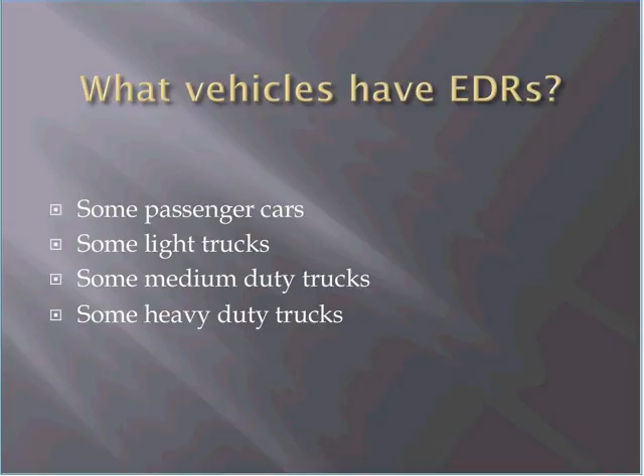Most others that I can think of seem to have them depending on the model of the vehicle, certainly model and year. Again, the newer the vehicle, the better the odds it will have an EDR in it. Some light trucks, same thing goes for light trucks. If it's got an airbag system, there's the potential it will have an EDR built into it. Medium-duty trucks are somewhere between pickup trucks and heavy-duty trucks, which are the next category. I'll get into a little bit the differences between passenger cars, light trucks, and medium trucks as a group versus heavy-duty trucks for those vehicles that have EDRs on board.

How can I find out if the subject vehicle, the one you're actually interested in finding out about, has an EDR? In heavy trucks, the EDR is typically part of the ECM. In a couple slides we'll get into what the abbreviations stand for - I'll do a little terminology so you won't be completely lost when confronted with this stuff again. But in heavy trucks, the event data recorder is typically part of the engine control module.

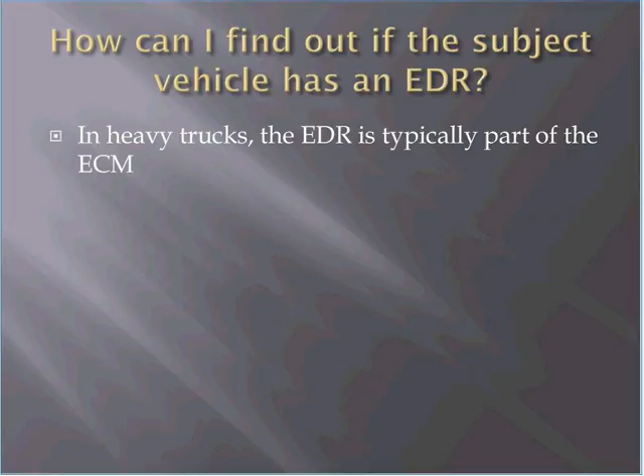I don't know if it started out that way. It turns out it is an event data recorder, but for crash applications or accident reconstruction, I think it was more of an afterthought, or somebody finally realized, hey, we can use this stuff for accident reconstruction. With heavy trucks, it's not so much a crash pulse as it is what was this truck doing. Literally, sometimes you can get data for a full minute before the crash happened as to how fast they were going, whether they were stepping on the brakes, whether the clutch was in or out. There's a lot of good stuff you can get from heavy trucks.

Heavy trucks' event data recorder capabilities are dependent upon which engine is installed in that particular truck. You can get a Freightliner truck, for instance, with either a Caterpillar, a Cummins, or a Detroit diesel engine, and depending on which engine is in that particular truck, that'll tell you how much data is available. Caterpillar has their own setup for EDR capabilities. Cummins has their own setup. International has their own setup. And so far, they're all different. Most of them are geared toward engine performance and fleet performance - it's not done with accident reconstruction in mind.

So keeping that in mind, we're lucky we get any data at all from heavy trucks. Typically, the data you'll get is in conjunction with the last time the truck came to a stop, or if somebody stops suddenly. The level of that suddenness can be programmed into the ECM to decide whether it was a sudden enough stop to bother recording anything.

But again, this is not typically crash related. It has to do more with engine performance and fleet maintenance than anything else, I think. But it does have crash investigation applications as well.

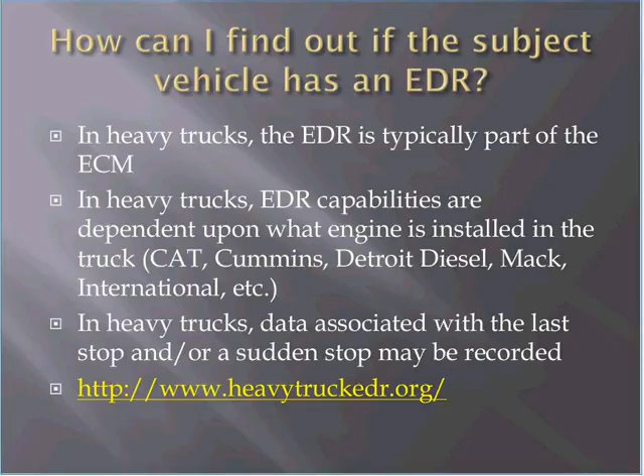All right, continuing on, for the light trucks, passenger cars, and pickup trucks, typically year, make, model, and on occasion the engine type - usually whether it's gasoline or diesel - no further distinction is necessary to find out if that particular vehicle has an EDR on board.

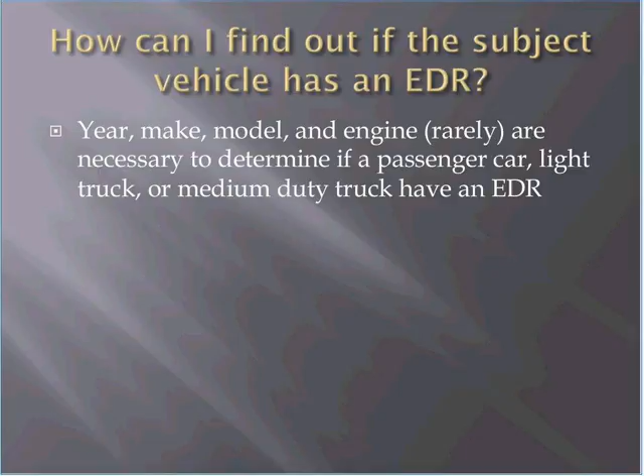Right now in North America, the software and hardware to access stored data, if it's available commercially, is going to be available through Bosch Diagnostics. I think they're the only ones still that make this type of equipment available. In some cases, only the vehicle manufacturer has the ability to access stored data.

On those vehicles that have EDRs, for manufacturers that have not signed on with Bosch to handle the technical end of the crash data retrieval stuff, only the vehicle manufacturers still have the software and data.

Even the ones that have licensed to Bosch - recently Toyota came on board - it's like a backwards integration of the systems. They start with the newer vehicles first and work backwards. Even though Toyota had EDR capabilities back to maybe 2003 or 2006 or somewhere along there in some of their vehicles, we don't have commercial access to every vehicle Toyota has made with an EDR, even though Toyota itself does, for example.

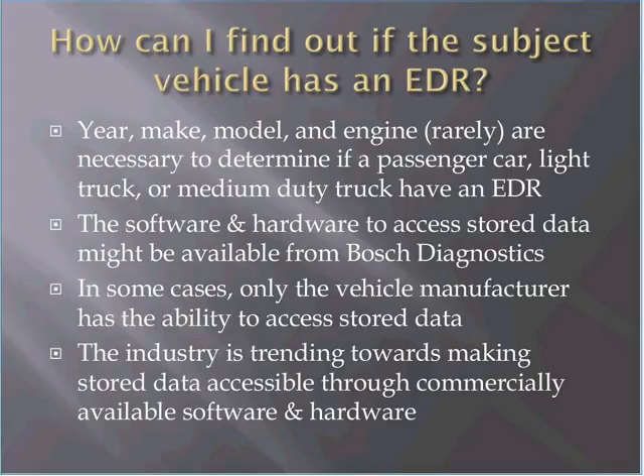The good news is the industry, I think, is trending towards making the data more accessible. Part of that is the upcoming federal regulations that I'll talk about in a bit, but they're starting to push manufacturers - if you're going to have an EDR in your vehicle, it's going to have to comply with certain things that the U.S. federal government has set up.

All right, so now to break away - because I really intended this seminar to be more about what we can do with passenger cars and light trucks and a handful of medium trucks than heavy trucks, since I could probably spend a day on each of them - from this point on, I'm going to pretty much ignore the heavy truck stuff and concentrate on the lighter vehicles.

So we're going to start with what is CDR as opposed to EDR. CDR stands for Crash Data Retrieval. This has been around since the late 90s, I think, is when Bosch - well actually it was Vetronix early on - but they started to get into this technology, and they're still currently the only ones in North America that make it available.

It's called the Bosch Diagnostics CDR system. It was formerly Vetronix, and then Bosch bought them up, is my understanding, or somehow they took control of Vetronix and started making their equipment part of the Bosch Diagnostics family.

Bosch makes the software and hardware available commercially to accident investigators, insurance adjusters, law enforcement - anybody that wants to buy it, basically. It's a program that you would load onto your computer or laptop that allows you to use a USB port connected to their hardware, and in turn connected to the vehicle in one manner or another, to access the data.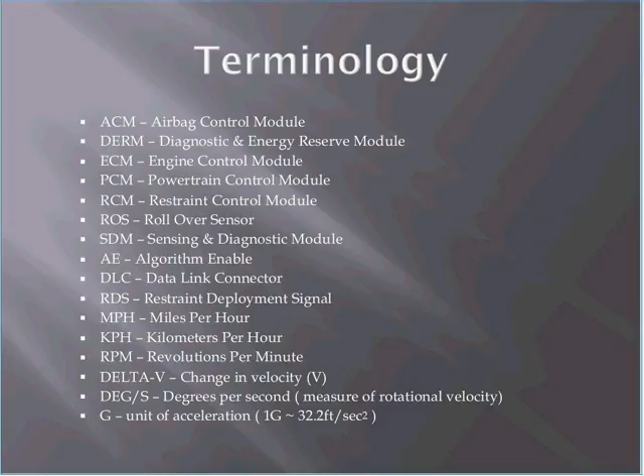Accessing data with the CDR system. Once you have the CDR system, how do you actually get this thing to tell you what you want to know? The first and what's considered the best way to do this is through the data link connector, which is underneath the dashboard typically.

You connect your laptop to the Bosch. It's actually a box filled with digital components and connectors, so it's wired in between your laptop and the vehicle. And some vehicles you have to turn the key on, some vehicles you don't even have to turn the key on. As soon as you power it up, you hit the go button on the software and it'll start to pull data from the vehicle.

The next method, if the car is so badly mangled, or if it's one where you need the keys and don't have the keys, or the wiring is torn out of the vehicle, or pretty much anything else goes wrong with the vehicle, you can access the module directly. Many times the modules are under one of the front seats, inside the bottom of the console, or buried in the dashboard near the floor somewhere. But usually in a matter of 10 to 15 minutes tops, you can get to the module and plug straight into it, bypassing all the rest of the wiring in the damaged vehicle.

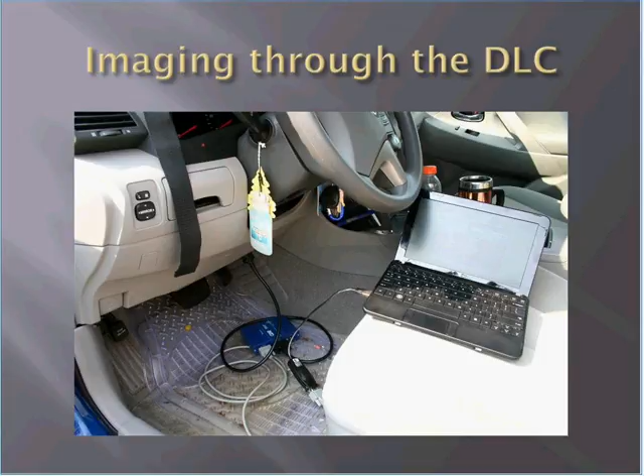Now, I tell people all the time, do we have the vehicle? I know it's been a year since the accident. It's long since been auctioned off if the insurance company didn't have a hold on it.

This was a case I did not too many months ago. The vehicle, this is about two years after the accident, was long since auctioned off, sitting in a scrapyard, being picked apart for odds and ends that survived the accident. I get there to look at it and I'm thinking, well, this is not too bad, if nobody took the airbag module out of it. I don't know why they would, since it's already been used once and shouldn't be usable in another vehicle, this particular vehicle anyway.

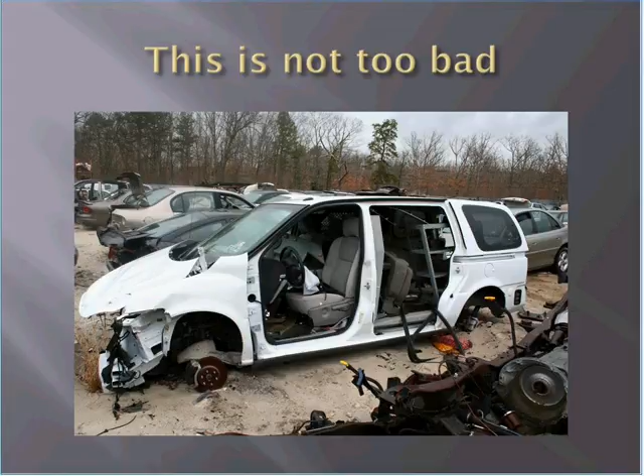So it doesn't look too bad. I said, at least we might get data from this one. Sure enough, I lucked out, and all the wiring to the data link connector was intact. I just had to power up the fuse block out under the hood, and even without the keys, this one gave me good information, even though it was a couple years after the fact.

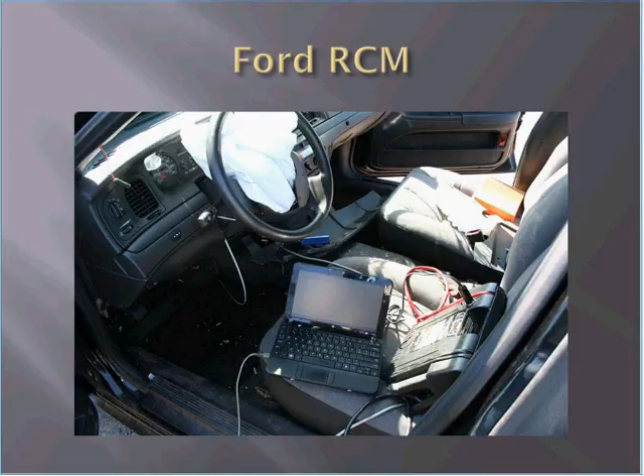Okay, now another download. This one, even though it looks like a dashboard type of deal to the DLC, it's not. This one was actually a Ford restraint control module. It's kind of obscured by the steering wheel, but you can see the airbag actually deployed in this vehicle from the steering wheel. I was actually plugged into the module itself. There's the module, located at the bottom of the dashboard.

You can see the vinyl floor mat there. The module's kind of underneath the floor mat. The gas pedal would be off to the left of that picture. So it's buried underneath the bottom of the dashboard, near where an ashtray would be in this car, I think. The connector for that is on the left side of the module. You would undo or remove that connector and sneak in the cable from your CDR unit, and you could download directly from that restraint control module in that case.

That same vehicle, in addition to the restraint control module inside, has the PCM outside under the hood, which is a powertrain control module, and that has a bunch of additional data in addition to the crash data stored in the RCM inside.

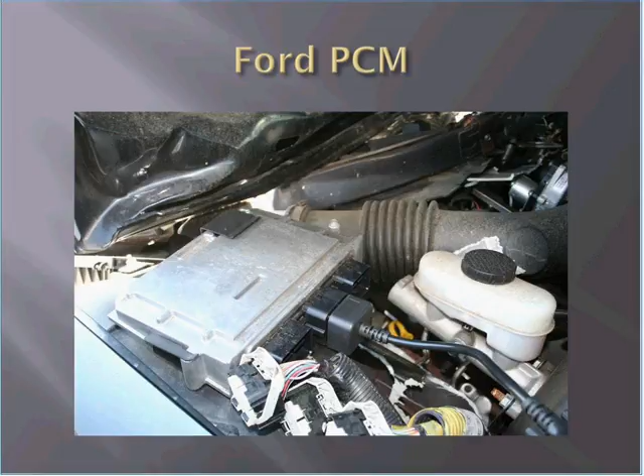Here's the connection. You see the black cable and that squarish looking plug. That's my CDR system plugged into the PCM. At the other end of that cable, it's plugged into the blue box, which is the Bosch unit. The gray cable extending away from that goes to my laptop.

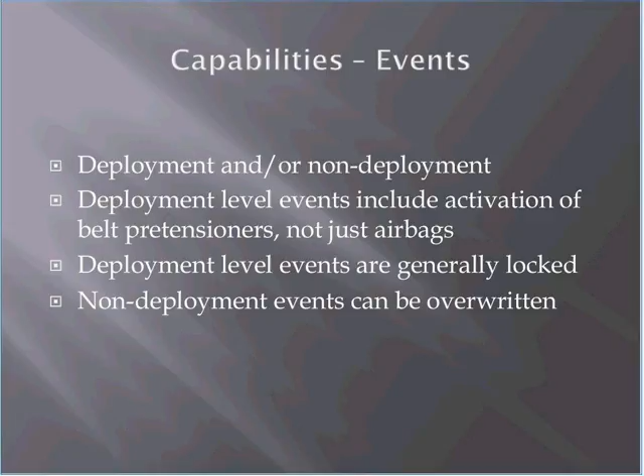All right, so now the capabilities — what kind of data might we expect to get from the different events? Certainly crash data at AE, which is algorithm enable, and after AE. So now we're talking about crash data after we've had an impact. That data is typically all gathered in a matter of milliseconds.

I'm trying to think what the longest run would be — 300 milliseconds comes to mind for maybe the longest run after algorithm enable. That's 0.3 of a second, so most of the crash is done and over with just that quickly. So crash data is certainly half a second after algorithm enable, or AE, is what you're looking at in that period.

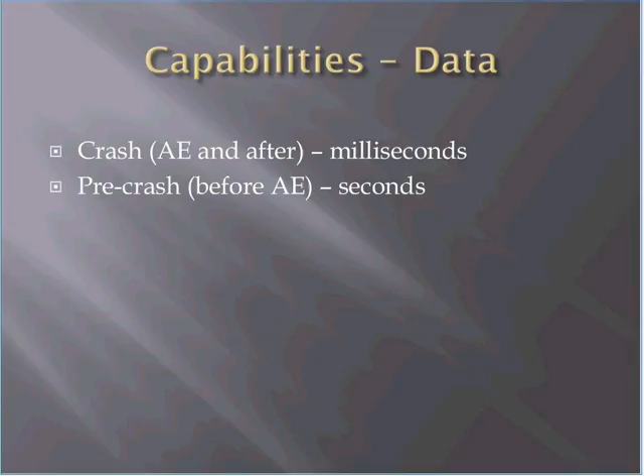Pre-crash data is what's leading up to the impact, or leading up to AE, and that could be anywhere from a few seconds to — some of the Fords will give you a couple of minutes, apparently, since the PCMs have much more memory to write things into than the airbag modules or restraint control modules. So certain Fords will give you several minutes of what the car was doing, speed-wise, brakes, what gear it was in, the whole nine yards, before we actually have the crash.

Certainly vehicle speed is one of the big things that people like to look at. Throttle position — what the driver was doing with the gas pedal, whether or not they were on the brake pedal or off the brake pedal — is another typical one. Engine speed, engine RPM, can give you an idea of what gear they were in, between that and throttle position. It tells you if they were really cranking on it to take off, or completely off, idling along with the brake on. You can judge those kinds of things.

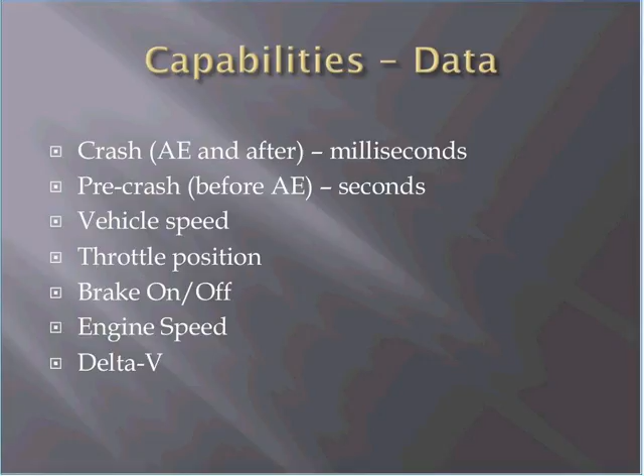Again, delta V is a common parameter that's displayed or gathered in a CDR imaging. And seatbelt status — with a few exceptions, I think you almost always get driver's belt status, which is about everything I've ever seen.

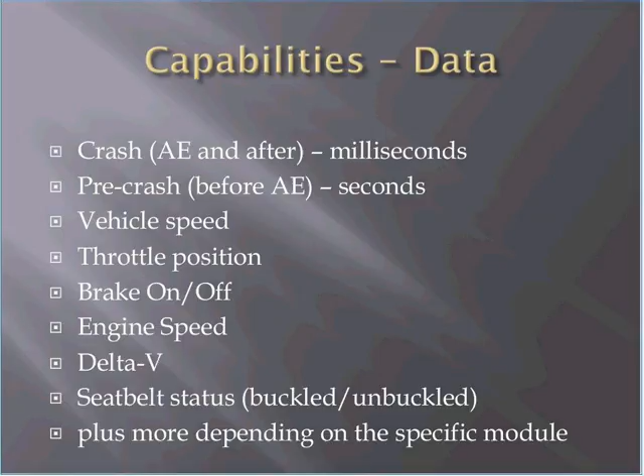As time goes on, the data that's available gets better and better with newer vehicles. They give you so much data, it's almost amazing anymore. It's hard not to view this as a standalone thing, which you shouldn't do, and I'll talk about that in a minute. But you do get a lot of data, everything from steering wheel input to whether or not the cruise control was active. A lot of good information.

Okay, now report formats. Once you've got the data and you've downloaded it or imaged the module, you've got the data on your laptop or desktop. What do you do with it?

The Bosch CDR system will save it in a .cdr file, which, unless you have the Bosch program, is pretty much useless unless you want to email it to someone else who has the Bosch program. You need the Bosch software to actually open a .cdr file. But the good news is we're told that CDR files cannot be manipulated or doctored in any way, shape, or form, unlike PDF files, text files, or comma-separated value files. The CDR file is almost guaranteed to be the real deal.

Next, the CDR program can also print out a PDF file. It's essentially the same viewing you would see in a CDR version of the report, except it's done in Adobe PDF for people that don't have the CDR program to open it.

And last but not least, the CSV files—the Bosch program can export all of its data into a CSV file that you can dump into an Excel spreadsheet or whichever program you like to analyze the data. I'll show you one example of that toward the end of the presentation, a slide showing what you can do with that data.

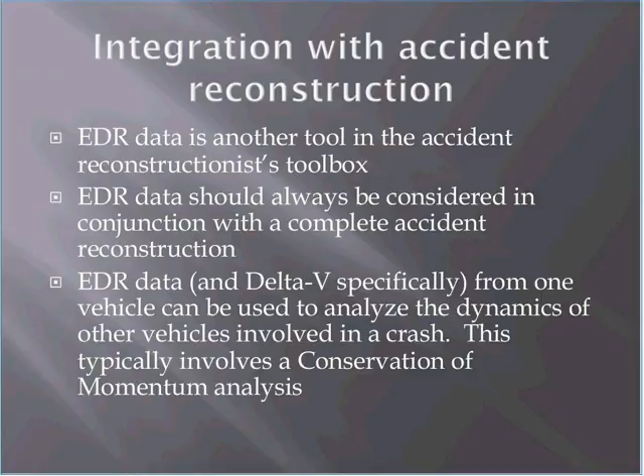So you'll more than likely be able to get the weights of both vehicles with the speed of one vehicle, or the delta V from one vehicle and the weights of both vehicles. You can do a lot of accident reconstruction just from those very, very basic things.

All right, now federal regulations. Back in 2006 or thereabouts, the federal government said, okay, it looks like this EDR stuff is going to be something we should watch over and maybe regulate, for lack of a better term. So they came up with 49 CFR, Code of Federal Regulations, Part 563, and that covers these areas.

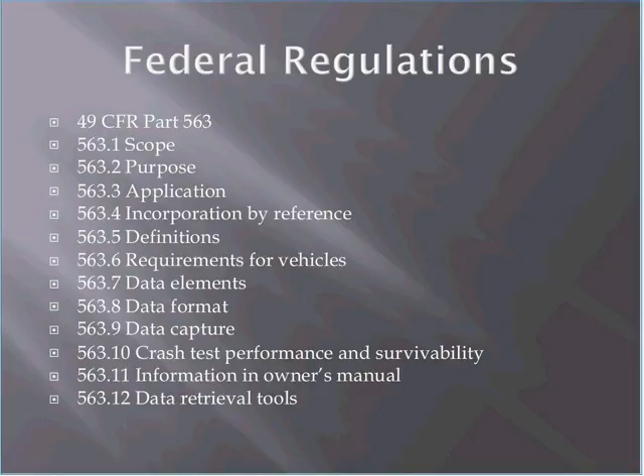And basically, I'm thrilled to see this because for many years I was an automotive technician, and nothing aggravated me more than having every manufacturer out there have different software, different hardware, different acronyms for everything under the sun, different parameters. There was no commonality between one manufacturer's line and another's with diagnostic equipment. And I feared that the EDR technology was going to go down that same road, but the federal government stepped in and said, basically, let's see, the next couple of slides I think it'll show you.

Here's what they said. This part specifies uniform, which is good, national requirements for vehicles equipped with event data recorders. Now you can read the rest and see that it concerns pretty much everything involved.

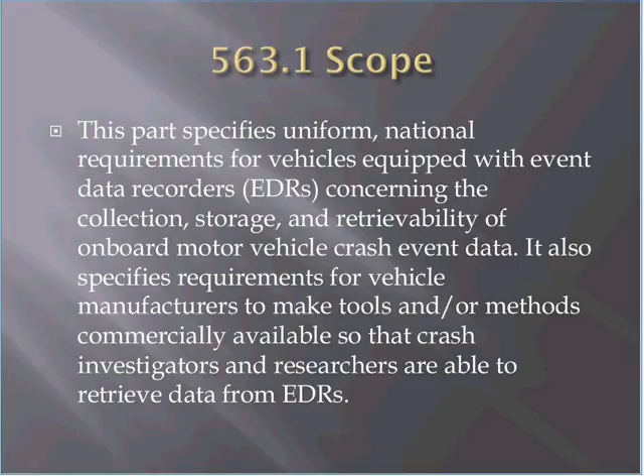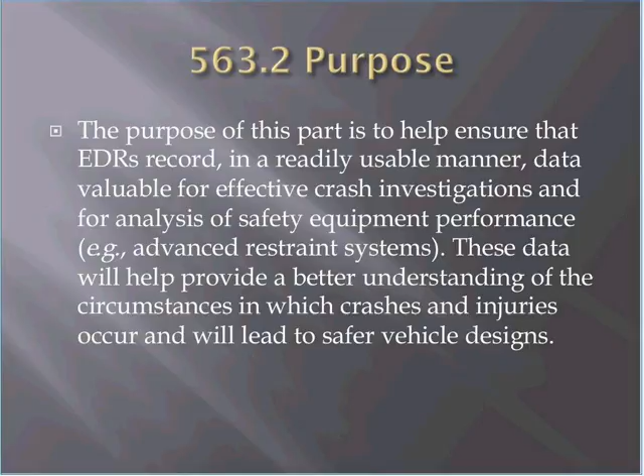But the kicker is, it's for vehicles equipped with event data recorders, and you'll see in the next slide or two. Okay, the purpose is to be able to access the data and present it for crash investigation and so on and so forth. But here's the real kicker.

It applies to vehicles. Originally it was September 1, 2010. It's now been bumped out to September 1, 2012, which is sort of kind of telling me it's going to be the 2013 model year vehicles.

And it's if they're equipped with an event data recorder. So I wouldn't be surprised if you're going to see some vehicles still not having an event data recorder, so they won't have to comply with what the federal government wants them to keep track of or to record and how long they want to record it and so on and so forth. So they're just going to flat out not have EDRs at all. But those that do, they're going to be tied into what the federal regulations say they're going to have to keep track of.

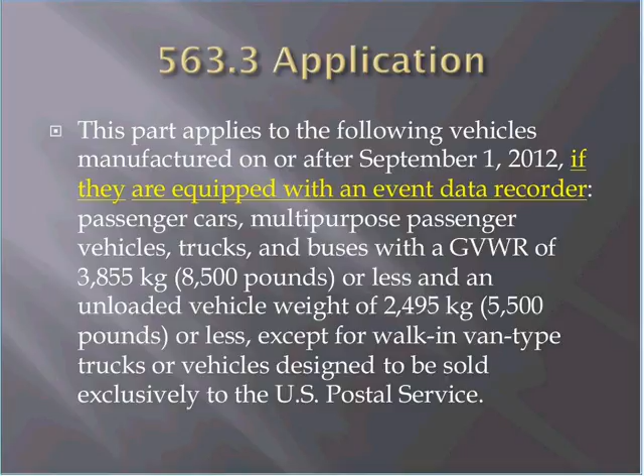Now, because we're winding up close to the end here, I wanted to kind of run through just one video of a crash test. It's not very often we actually get a video of a real live crash, and although I have plenty from crash conferences, and those are well documented in CDR reports, this one I had handy, so I grabbed this, and I wanted to just go through it maybe once or twice and highlight a couple things.

For you to see, if I can get the video to work here. It may not work. We're going to have to— we can send out the link to the video because we would have to do a special embed on the PowerPoint. Sorry, George. That's okay. All right, so we'll send it out. We'll send it out though after the webinar is over.

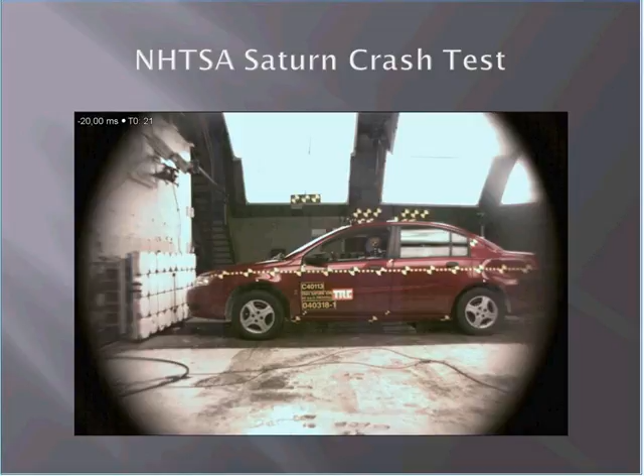The last thing you'll want to look at in the video: the vehicle impacts the barrier at a speed of 24, 25 miles an hour, which we'll see in the next slide. After it's done impacting the barrier, it bounces back away from it, and that's going to be significant—we'll see in the next slide why that's significant.

System status at deployment: the SIR warning lamp status. SIR is Supplemental Inflatable Restraint system—essentially that's your airbag light on the dashboard. That was off at the time of impact, which is a good thing because it means there were no diagnostic trouble codes before the impact.

The driver's belt switch circuit status shows unbuckled, which we would expect, because in the video you see them really launch into the windshield.

Ignition cycles at deployment: 66, which tells me this is essentially a brand new vehicle—that's very, very low for on and off cycles of the key. Ignition cycles at investigation, only 3 cycles later, after they whacked the thing into the wall—they must have moved it around a little bit—69 ignition cycles at investigation.

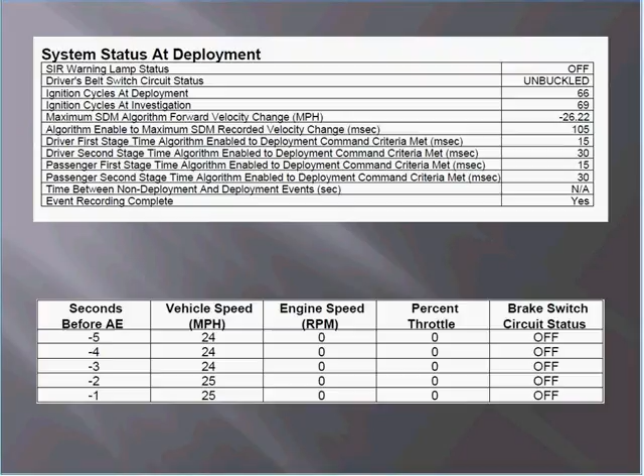Next couple lines down, driver's first stage, driver's second stage—you can see at 15 milliseconds into the event, the airbag module had already made the decision to fire the airbag. The last thing in the top chart, event recording complete, shows a 'yes,' which is a good sign—that means we captured all the data there is to capture.

In the older versions of the program—since this testing was done back in '05 or '06, I think—they used to provide a graph of the basic parameters, the pre-crash information leading up to the accident. We have vehicle speed, shown as the reddish-orangish line, almost straight across at 24, 25 miles an hour.

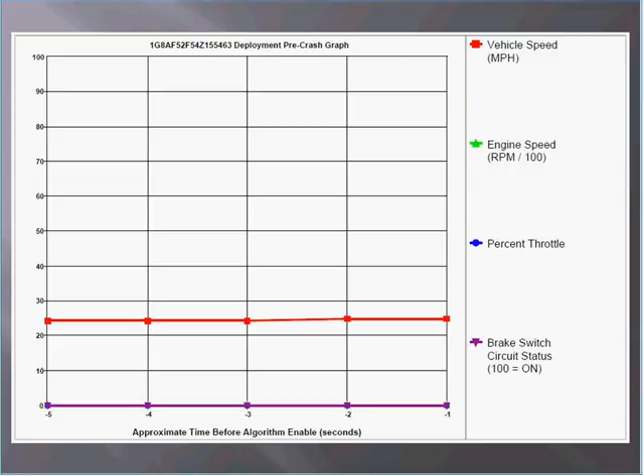That's like a straight run in. Engine speed, percent throttle, and brake status are all overlapped at the bottom of that graph because they were all 0. The engine wasn't running, so engine speed would be 0. The dummy was not stepping on the throttle, so we have 0% throttle, and the dummy was not stepping on the brake, so we have zeros. We have straight zeros for those three items.

The crash pulse - this is the crash signature or crash pulse that the module actually records. It starts all up in the left-hand corner there near 0. The first 10 milliseconds we don't see, so there's a little bit of a drop in the first 10 milliseconds. Time in milliseconds runs across the bottom of the graph.

We can see it drop from 0 down to 26, just below 25, which corresponds to the table we had looked at before. Across the bottom of this graph, we see 10 on the left and 150 on the right, so that tells me this particular module was capable of reading out to 150 milliseconds, but it shut off at essentially 110 milliseconds. It doesn't give us any data past 110 milliseconds, because the slope of that graph leveled off at 100 to 110 milliseconds. There was no more change in velocity - it kind of leveled off at 25, 26 miles an hour.

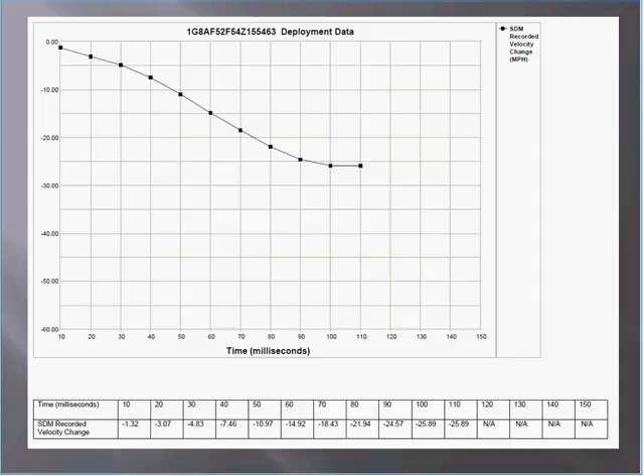So the module says, you know what, I'm done here, there's nothing else exciting going on, I'm not even going to bother recording any further information. So the module just discards everything beyond that point, which is also normal.